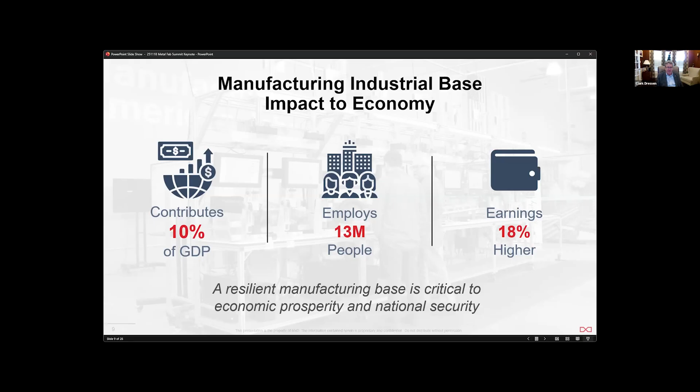So let's talk about some of the challenges. What's happening in the industrial base? Between 2010 and 2020, the number of manufacturers in the country actually went down by 20,000 manufacturers. And nearly all of those losses were small manufacturers, small and mediums. So that's a bit scary - that's 11% lost in the last 10 years.

In 2021, manufacturing surpassed all other sectors as the most cyber attacked industry globally, a trend that's continuing. And we know you see all types of focus on IT, enterprise IT and email, and the threats that come across there. But the OT, the operational technology of how we run those manufacturing plants, it's a target, and we've got to continue to double down and make sure that we are just as secure on the operational side of things as we are on the IT side of things.

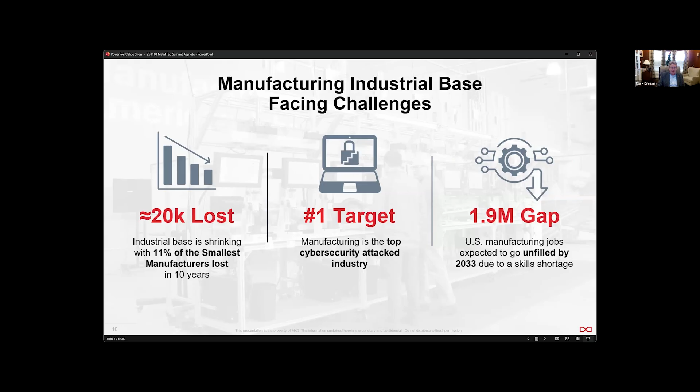And the number of unfilled jobs in manufacturing is close to 500,000 today, and it's projected to rise by nearly 2 million by 2033. And that's because of a retirement projection and an aging industrial population and everything else. So we do have some pretty key challenges that we've got to continue to try and address.

All right, so let's talk about advanced manufacturing related to technology, related to digital transformation. Whether you're doing additive manufacturing, 3D printing, to AI-driven factories, to metal forming, and using robotics and data to streamline those processes - those tools, advanced manufacturing is really revolutionizing industry. It's driving innovation, it's driving productivity gains.

But all of that relies on a strong and secure digital foundation - generating and aggregating data throughout the manufacturing life cycle to make informed decisions and improve operations. An end-to-end, top-to-bottom approach to really design to production and sustainment, and integrate the entire supply chain from those largest suppliers to our smallest suppliers, so you have visibility and reliability of supply chain and product security and all those type of things.

And data security - making sure that we don't put our nation's assets at risk. A lot of our manufacturing data is intellectual property. So how we manufacture the assets that we manufacture with, those are intellectual property, and we've got to make sure that we lay the foundation, and we get the data, and we get the networking, and we get the transparency of information from the shop floor to the top floor and to the operators. But we've got to do it securely, and we've got to do it reliably.

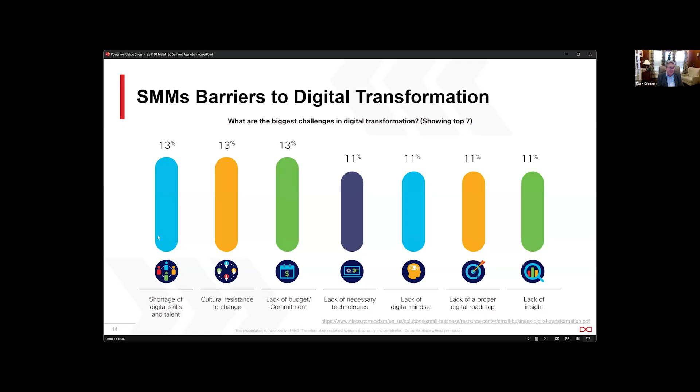So in the last few slides I'm going to cover today, I'll go through a few examples of projects. I can't cover them all, so I'm going to cover a few that I thought best fit what we're talking about today.

We've got production issues that pop up because of a design time decision. During design, something got designed poorly, and it caused an issue in production. We won't ask if anybody else has seen that - we'll probably have a lot of hands up. But it's a universal problem that happens across all industries and manufacturing processes. We have very experienced designers who have the knowledge - they've made the mistakes, they've learned to fix them, they know how to avoid them.

But at the same time, 25% of the workforce is expected to retire in the next decade. So you've got new designers, folks that have never learned from that knowledge. How do you start to incorporate that? How do you capture it so you don't have to make those same mistakes over and over again? This particular project, CODA, tried to do that for printed circuit boards.

I know that's different than metal forming, but it's a similar idea - they had a manufacturing process where design changes caused problems in production down the road. So they applied some AI tools to look at past designs and help educate designers up front when they're making decisions, educating them on what those downstream effects could be. This one was adopted, implemented, they built the culture around it, and it was considered a strong success by the company.

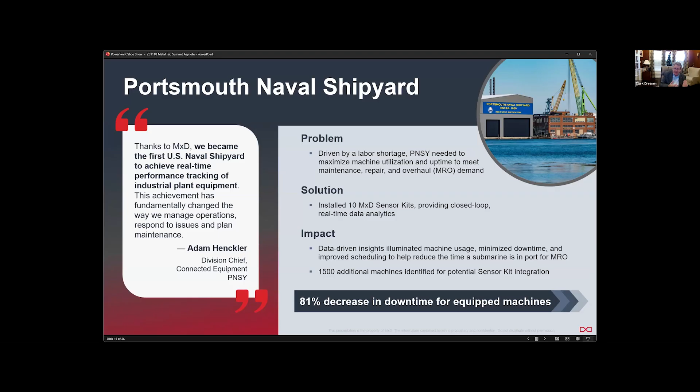The impact was significant and provided an immediate ROI. You can see a nice little quote from one of the folks there on site, and shop workforce has been very effective thanks to that.

Quick talk about what the sensor kit is. The technology doesn't have to be all that challenging or even expensive. The sensor kit, pictured on the right-hand side, was basically a really simple interface where we said, let's make sure we can get some basic temperature, vibration, current draw, viscosity, whatever the need was. A very basic sensor kit with 4 analog inputs, 4 digital inputs, nothing fancy.

But it gives the ability to start collecting that data, maybe put up something really simple like a stack light, red, yellow, green, if you start to get outside of a specific characteristic. It's a self-contained compute device that can gather and analyze that data in real time from manufacturing equipment, so it's a real closed loop approach. It's secure, which it had to be, obviously being a DOW site, and it's really focused on the solutions they were having on site, getting the visibility and the data to the operator to support that digital adoption.

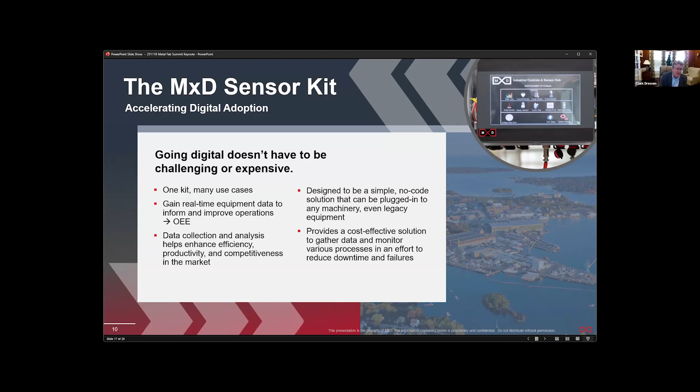I've got one more example that uses that same sensor kit, but takes it one step further. We built on that success and started working with Picatinny Arsenal. Picatinny is interesting because they manufacture energetics, right? They are one of the places that manufactures TNT. These are critical to munitions, critical to bombs, those explosives.

In partnering with Picatinny, they came back and said, hey, we would really like to build a digital twin of our entire facility. We started talking to him and said, well, you can do that, but it's going to be very expensive. You don't have the data. It was a request without a lot of meat behind it, and these things take a life of their own sometimes.

So we started to partner with them and said there are a lot of reasons that starting with a digital twin of your entire facility may not be completely accurate. How about we start with one process? So we focused on the TNT melt pour process, a critical element of the manufacture of explosives. It takes a lot of...

solids and liquids. You're mixing them together, and the process today took a lot of experienced operators who knew just how to get it just right. It needs a little bit longer, sight, sense, smell, touch. How do you know when that point is just right, when the melt pour process is good and your TNT is now effective? So we modeled through this and said a digital twin would absolutely provide the right real-time monitoring of the process, no matter who was operating the equipment, experienced operator or younger operator.

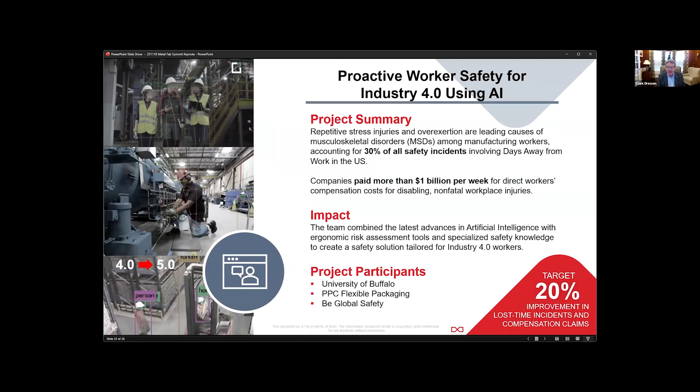I'm just going to touch on one last topic, which is training. We are hard at work in providing resources and training information to employers and employees. We developed 4 workforce readiness guides, and they are focused on key digital and cybersecurity skills for over 750 different roles in manufacturing. And those guides are free. They're available, they're part of that network. Again, if you're a partner, you have access to those, and you can use them for writing job descriptions, hiring, industry recognized certification training, all those types of things to go forward. So that is absolutely available.

Anyone can engage with the courses. We have an MXD Learning Training Center. There's thousands of free and paid courses that are available from MXD and other third parties, and users can move through those at their own pace. I think there's 300,000 individuals that have already engaged in some of these workforce programs. So it's available and good practice.

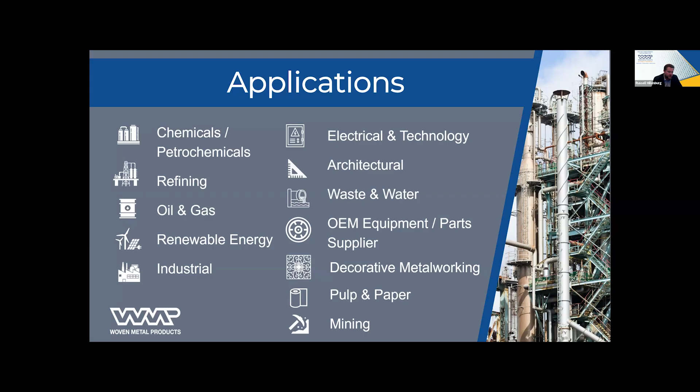We've been leaned on by our customers for one of the reasons of our expertise, but also we have everything under roof. So when it comes to the manufacturing side, we've got perforating, laser, water jet, large plasma, as well as all the welding, forming, robotics, drilling. And because of that, we're able to control all the different variables. So it makes design, R&D, all of that more flexible, because we just go and say, okay, let's try this again. And our partners have really come to us for that one-stop solution. And then how do we solve problems? We've actually had the luxury of co-patenting with international firms, and kind of that solutions provider is what we look at being.

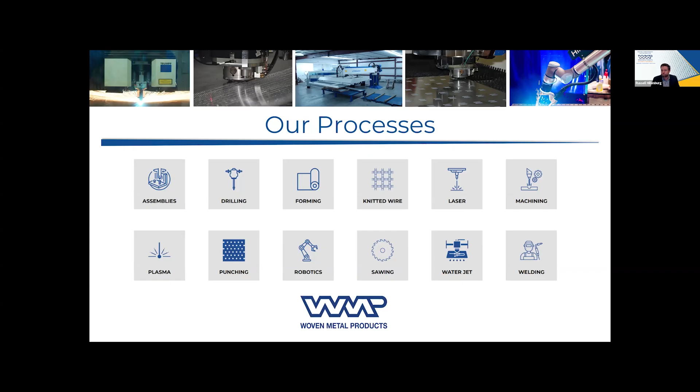Fantastic. Wow, you can really cover a breadth of fabrication processes. That's amazing. And I'm excited to hear a little bit more about those patented projects that you worked on.

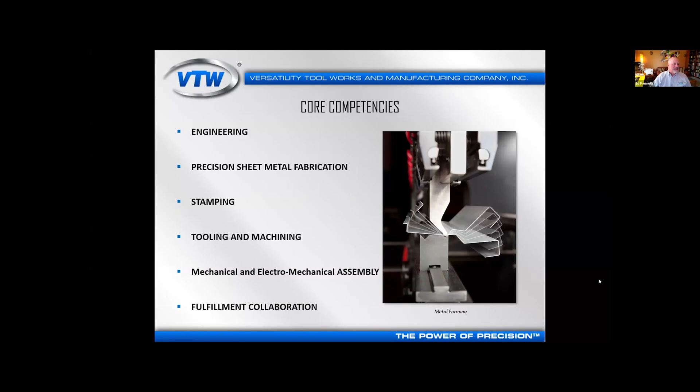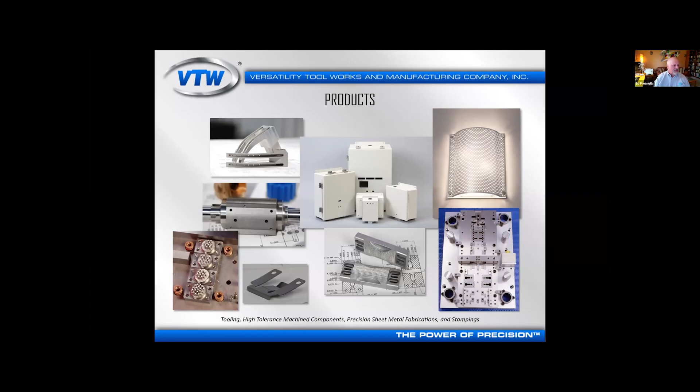Yeah, just a quick example of what we do - we have a couple slides here on the products that we make, but a lot of enclosures. We work closely with architectural lighting companies. Still do quite a bit of precision machining, sort of tooling related, low volume, high tolerance machining, and high speed stamping, along with metal fabrication. Okay, thanks so much, Ed.

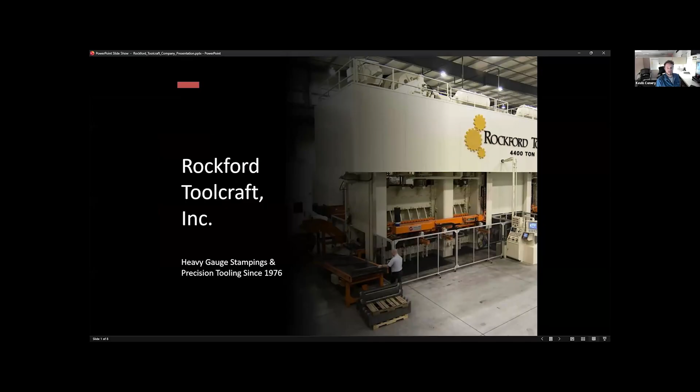Yes. Okay, so we're up from Rockford Toolcraft. We've been around since 1976. Our focus is on metal stamping. We have presses up to 4,400 tons.

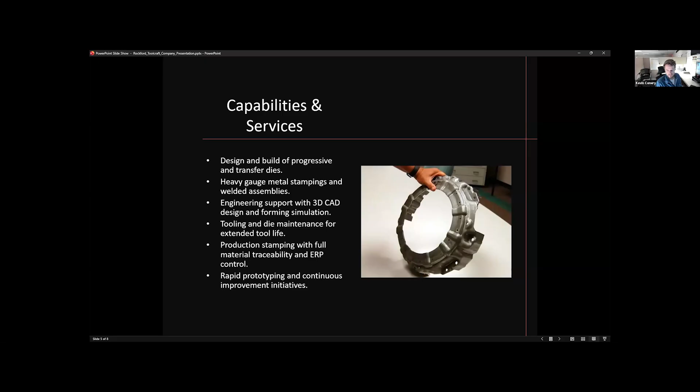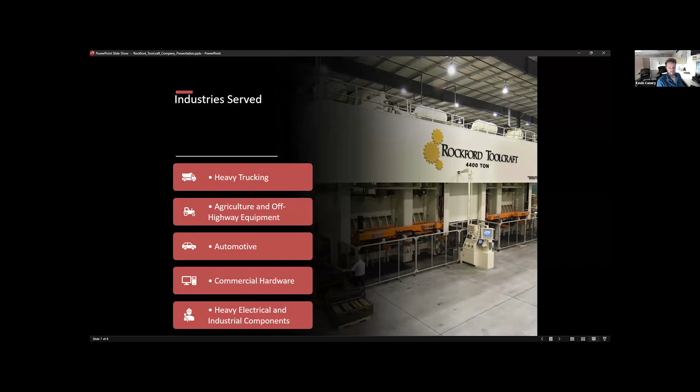Just some slides here. We have 2 large facilities nearing 500,000 square feet of plant space, near 400 employees. We design and build progressive and transfer dies. Our main focus is on heavy gauge metal stampings, but we also do work with fabrication. As far as press brakes and lasers go, we have 2 5-axis lasers, great quality control systems. Our main industries are heavy trucking, agricultural, automotive, commercial hardware, and heavy electrical and industrial components. You can contact us if you have any further questions about any of that kind of stuff.

I'll keep it short and sweet. I was just thinking the same. Thank you for that. No problem.

So we'll go ahead and launch into our first question, the main one: which design for manufacturing strategies and approaches have you found to be successful? We'll start with you, Jeff, and proceed through.

I'm basically showing customers or potential customers how we can help improve their quality and lower their cost through design. We'll often get something in for quotation, and we will offer them suggestions on a second quotation that'll show significant savings. We'll also point out quality enhancements that we're adding to the design. So that's mainly how we look at it - as early supplier involvement.

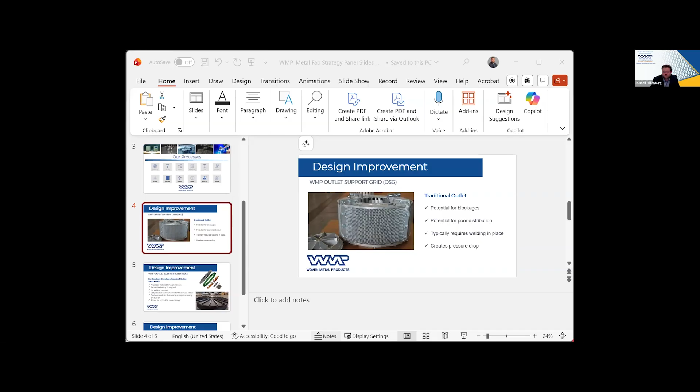Okay, and Russell, can you tell us a little bit about what strategies you have found to be successful? Yeah, I'd love to share a quick story - and that I love, is stories. So that is around, we love to go talk to clients and just ask what problems they're having.

And so it starts with talking about the issues. And then we say at Woven Metal, we're a solutions provider, and we try to live that. By living that, we say, what are your problems? Tell us how we can help you. And the biggest thing that salespeople or our industry doesn't do is they don't listen. They come in saying, this is what our solution is, instead of getting your problem and letting us help you develop a solution.

So this is a picture - this is at the bottom of a reactor, and this is a standard outlet. What happens is gas flows through this, and it's got catalyst around it, and they clog up. They have massive problems with what's called pressure drop, which takes a lot of pressure, a lot of compression to get through them. So we started listening to customers, and with that we went and we designed.

Welding in our industry is a big deal, especially on ASME coded vessels. So we designed a complete new solution that we then took to the client and said, hey, what if we did this? We took that standard design and completely redesigned it with their input. They were saying, hey, we need better distribution, we need it to look like this, we need less pressure drop.

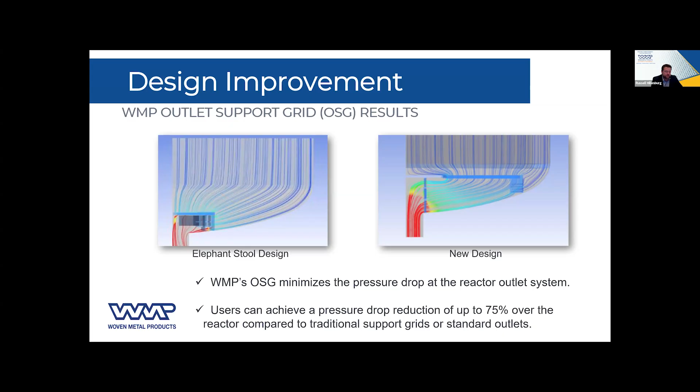Fantastic. It sounds like we're hearing some recurring themes of working with the customer, and I love listening to the customer and asking them first about their problems and trying to step them through solutions. That was really great, Russell.

Thank you. And let's go on to you then. What strategies and approaches have you found to be successful? We've really found...

doing what we call integration, process integration, on customers' parts to be one of the most successful things. And what I mean by that is combining whatever we can into the primary blanking process and leaving those things further downstream, being able to eliminate them.

Examples might include eliminating hardware insertion or PEM nuts, let's say, and extruding holes in the blanking process and tapping them right in the blanking process. So we've got some unique equipment that allows us to do that, and punch laser combination machines that allow us to integrate blanking, forming, and even tapping into the primary processes.

So what happens is, instead of having a workflow that says we're going to blank, then go and insert hardware, and then maybe go into the press brake and make some little flange forms, and then do the main forming, we can do a lot of that. We can do 3 out of those 4 things right in our blanking process. And that's an incredible cost savings down the line.

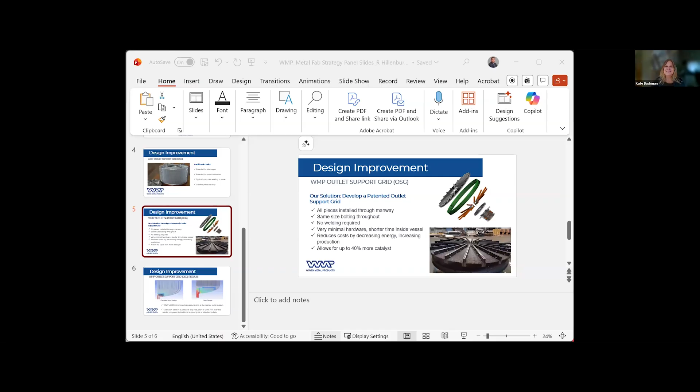So this is a before, and we still make this product a lot. It's very small, very simple. It does the job, but it's not appearing on the screen properly. Let me try again. There you go. Okay, so this is the before.

You've got a very small manufactured part. It's about, I'd say, an 80-plus-year-old technology that's been used across industry, maybe even longer than that. There's been very small variations, but the actual tech behind it is very, very old.

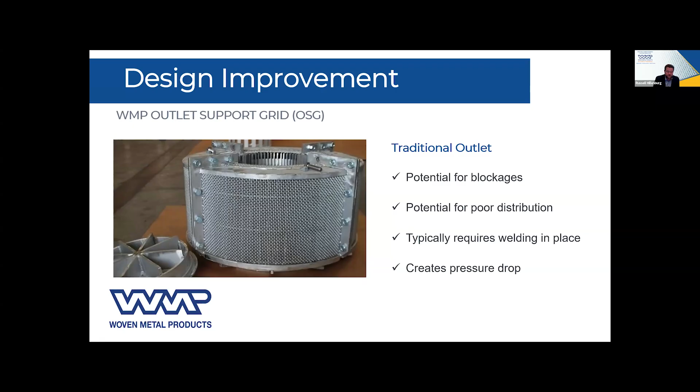So this is the new. If you look at this picture, basically it's the difference between just that little circle in the middle and the whole circle. So not only is there a lot more fabrication of this, but the longevity is a lot longer too. When we start going through the pluses, we didn't even realize.

For instance, we put it in an application, never appreciating what it would do. In this application, they wanted continuously cycling valves. Because of what they were able to do by putting this in, they reduced their valve cycle count by 75%. Their valve life went up by a factor of 75%.

So the downstream costs - in this application, which is in large refining, the entire project paid for itself in less than 90 days. Including construction, including downtime, including everything.

So it's that shift changing and industry changing kind of manufacturing - that's why we were able to patent it, and that's why so many different parts of the industry have said this is the right solution. That's very cool, it's really good.

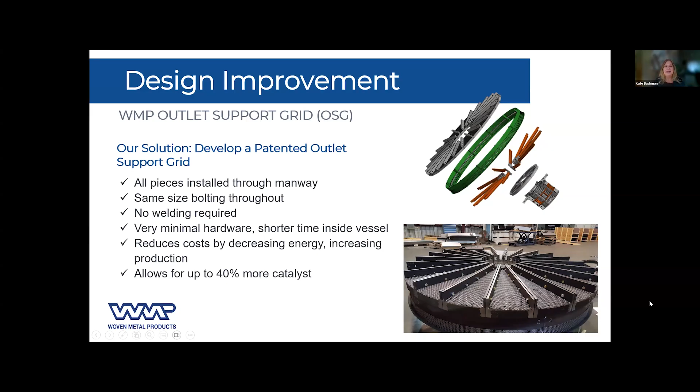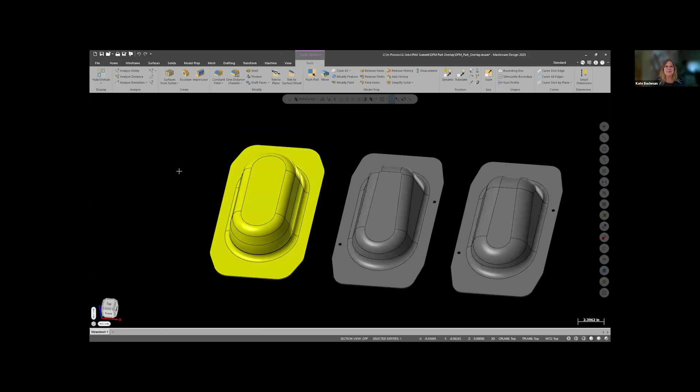I'm going to leapfrog over to you, Kevin. I know that you had some specific examples you're going to show. And then you're muted again, Kev.

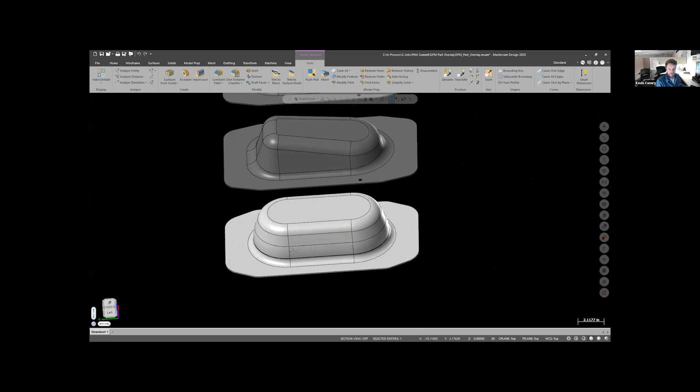Okay, there we go. All right, so this yellow part here was the part that we originally quoted. It's a good sized drawn part, about 16 inches across this way and about 9 inches across this way, the flat pattern you see. It's a good candidate for a drawn part - we don't have any issues with it.

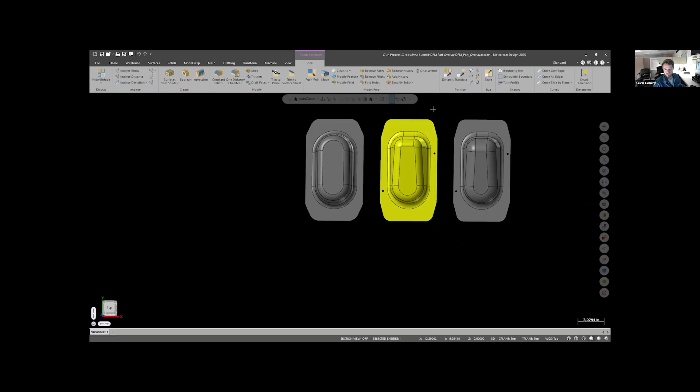It autoformed great during the quoting process, but by the time we got the actual PO, the part looked like this. It changed pretty drastically on this back edge or front edge, with some significant changes. When I ran autoform on it again, this whole back half of the part was blowing open - completely breaking.

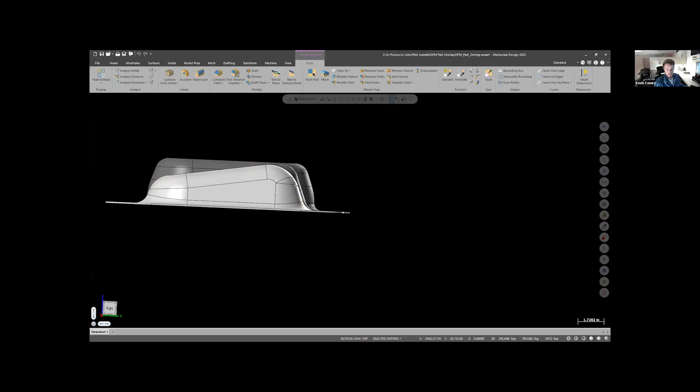So we had to go back to our customer with a part that I remodeled, which you see right here, with some more generous radii going on. Especially back in this area, I was really able to dial off this radius here to go from this to this. This part autoformed successfully.

It still worked within their assembly and what they needed it to do, and we didn't have any issues. That kind of brings us back to the first point - if we can collaborate early and often, we're able to have that communication with our customer where the customer says 'this is the part and it works,' and then we're able to say, 'no, your new part doesn't work, this will work.'

And they just kind of take our word for it and run with it. They plug it into their design and make sure that it matches what they needed to do - fit, form, and functionality. Everybody ends up happy because the part works. It works for us, it works for them, and it just works.

That's great, that's a really good example. Ed, can you go ahead? I think you had a couple of slides too. Yeah, I do, hold on a second here.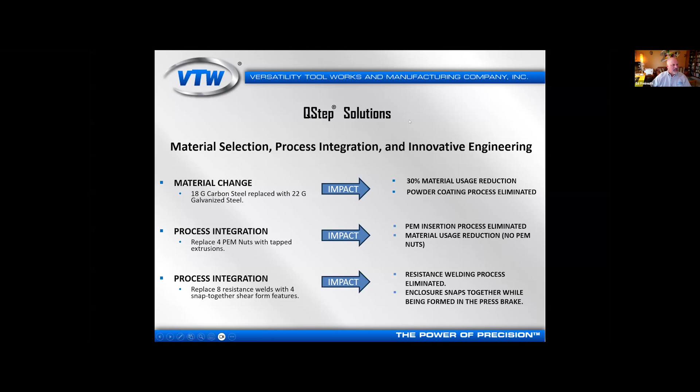We took these things and brought that back to the customer. We did a virtual prototype and showed him what it would look like. We showed how the snap-together feature worked, and everything was approved. So what happened was we went from what he brought there to this.

This is the snap-together feature here, I've got a couple different views of it. It's kind of hard to see, but you can see this little red tab - basically we're forming that out of the box. Right on top here, in this view, that's another form that's formed back down into the interior of that little shear form. There's a hole that's punched in this flange. This is normally where the welds would go, right here and here.

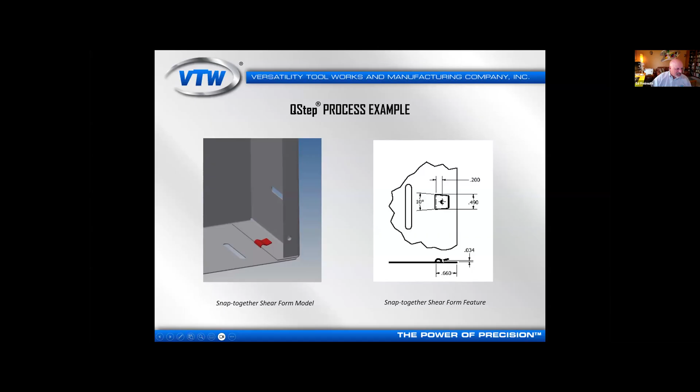You can kind of see the design here from the side - it's got kind of a wave form to it. But when you look at what that looks like on a flat blank, here's the three big changes we made: here's the shear form feature to snap together, here's the hole that's punched in the flange, so when this is folded together, this little shear form on top here is going to snap in there. And over here you can just barely see the extrusion, and that extrusion is tapped for an 8-32 screw.

So this is kind of what the flat blank detail looks like. And we repeat this on each corner, so it goes around the 4 different corners.

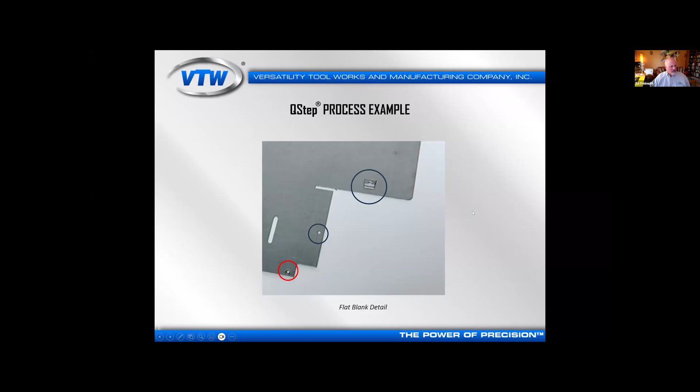And then basically, this is the finished part here. Again, simple part, but we've made these changes, and you can see here in the corners, here's that snap together feature. Up here on the top, this is where that front plate mounts. Those are the 4 extruded and tapped holes. And this is a laser cut part that is also having these formed features added to it as we go through the blanking process.

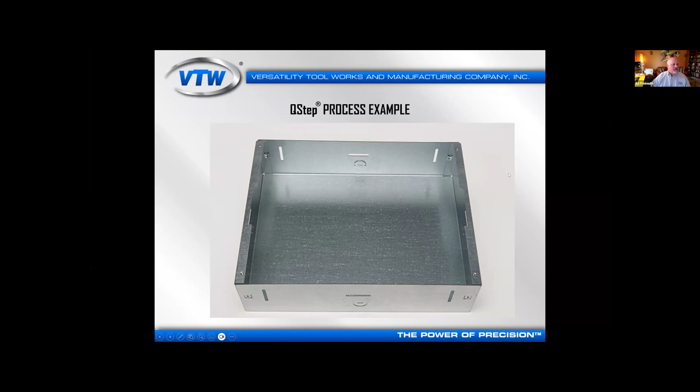So that was that we made prototypes, we tested them, the customer tested them, everything looked good, and they were happy. But it's all fine to be able to do these things, but what are the results? What did it really mean?

Well, by reducing the material thickness, we were able to reduce usage by about 30%. By integrating the welding together into the blanking process, we did that as well, so we eliminated a process. We integrated the hardware insertion process, and again, we eliminated a process with tapped extrusions.

But the business results: unit cost of this particular part was lowered by 34%. Lead time was compressed from 22 days to 10 days. So they're right there at the customer's goals, and we impacted those pain points for him. At the end of the day, we had a very happy customer.

So that was a good success story for us by utilizing the QStep process, utilizing the capabilities of our manufacturing and engineering and tooling design, because our engineers came up with that snap together, and we did a couple different iterations before we got it right. But at the end of the day, this was a big win for the customer.

It is an excellent example. I loved how you were able to show changes in material, changes in process, not painting, going to galvanize instead of painting, and the ultimate best scenario for your customer is not only a good process, but reduced cost. I know, Jeff, you were talking about how you work with your customers and are frequently able to reduce costs.

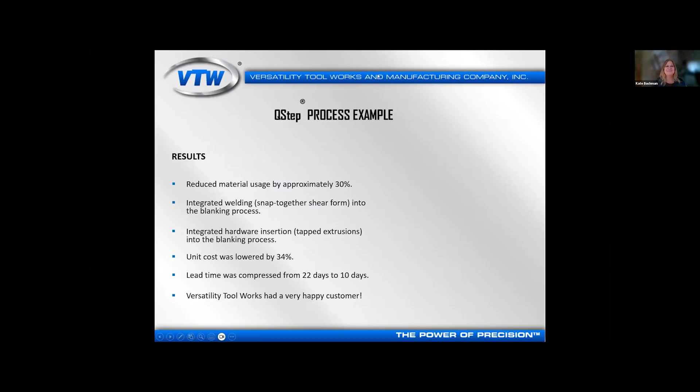All right, let's get going with our second panel discussion today. We're going to talk about automation strategy for the sheet metal job shop. We've got a few experts from the field who can tell us what they've been doing with automation projects and what the strategy is. For that conversation, I'm going to turn things over to Metal Forming Magazine Senior Editor Lou Kren.